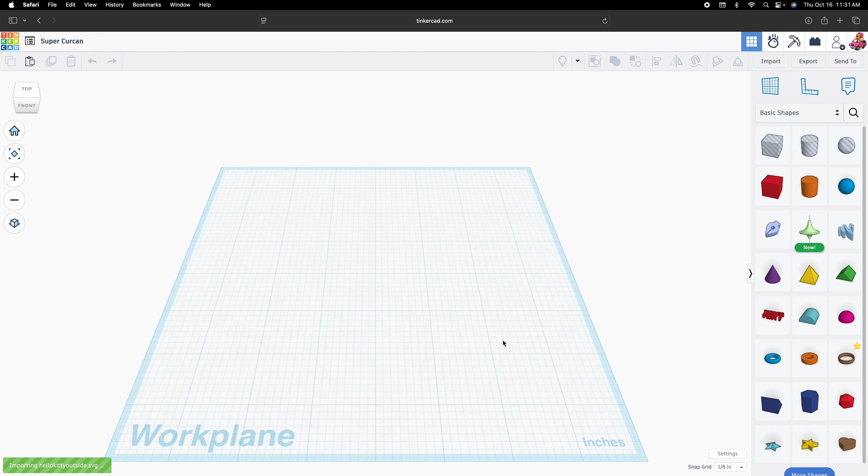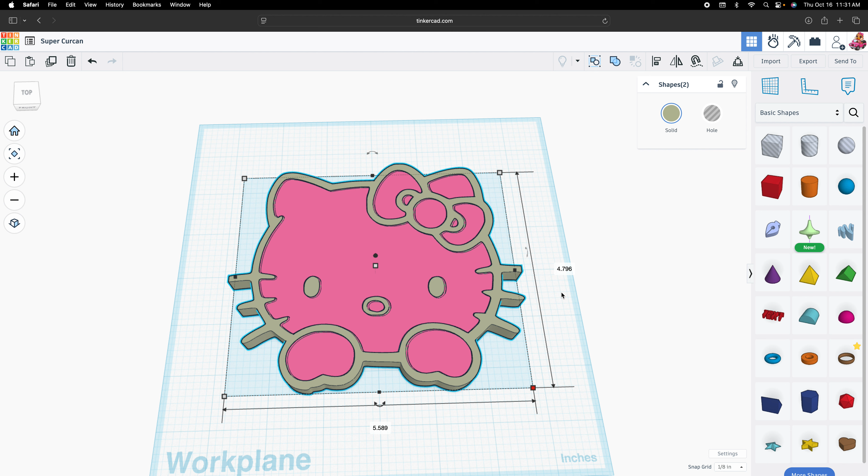Let's not do that. Click. Alright, 7, and then we want 7 here. There we go, finally. Alright, I usually center it.

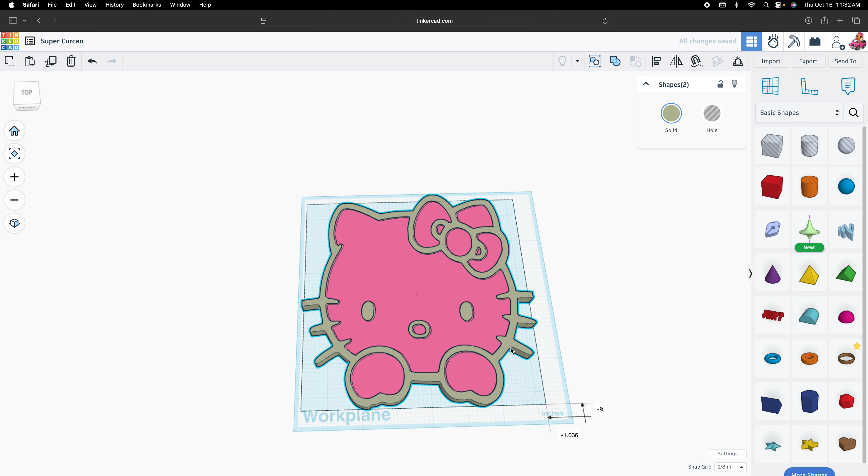Now I'm going to take the center part out and move her off to the right. I'm going to take the outline, move it to the left. I'm going to duplicate the outline, bring her back to the work plane. We'll take our quality all the way up.

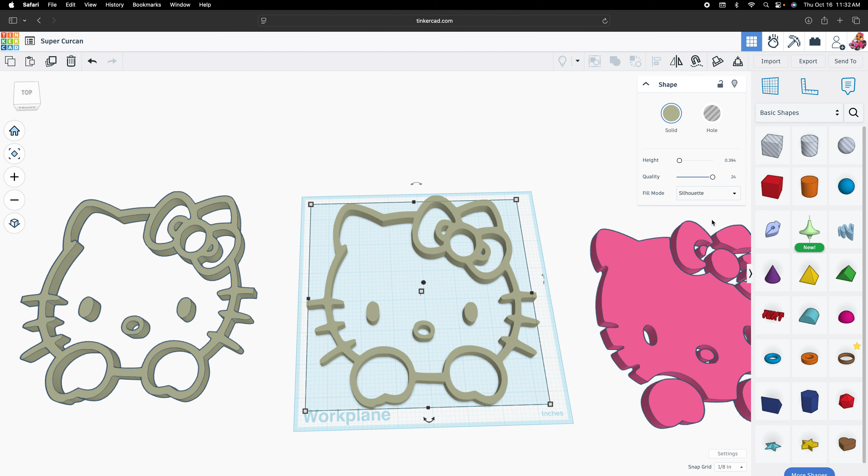We'll click on Fill Mode, Silhouette. We'll fill it all in. Hopefully - there we go. Now we'll turn it up like this, and we are going to push it down to an eighth.

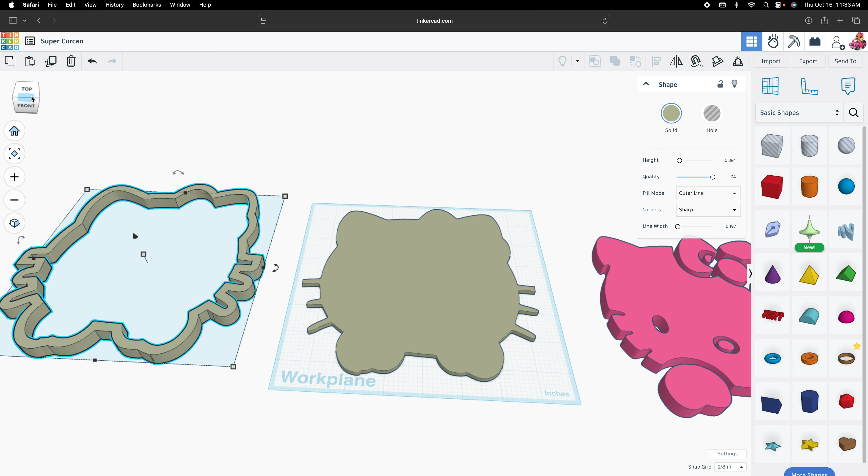Now we'll go back over here to the original. We'll go to Quality, Fill Mode, and we'll do an outer line. There we go. We're also going to turn that around, but we're going to bring it up to 1 inch.

Bring it back over here, set it on top of the silhouette. We'll highlight both of them, go up here to Align. Align it. Good to go.

Select them both again, group them. There we go, see, it's all nice and grouped. Now I'm going to change that color because I don't like it. Make it black. See? There we go.

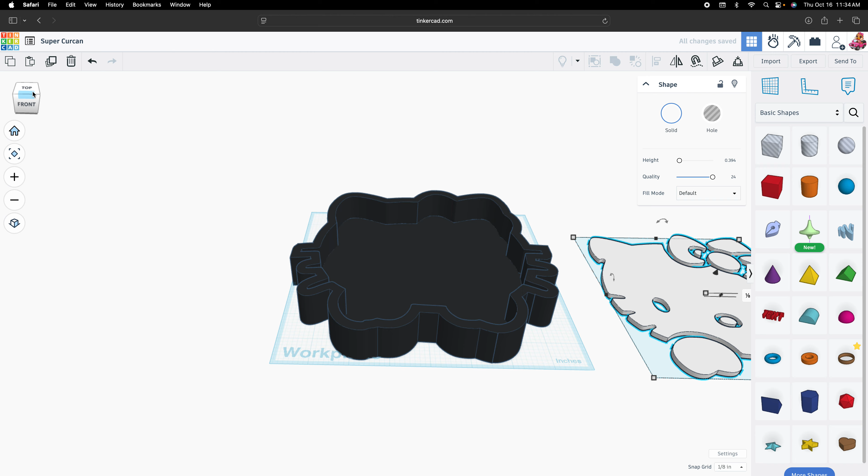Nice and neat. Now we're going to take the inside portion, bring the quality all the way up. We'll change that to white just because. I'm going to push her down to a 1/8 of an inch and bring her up and over to the object here.

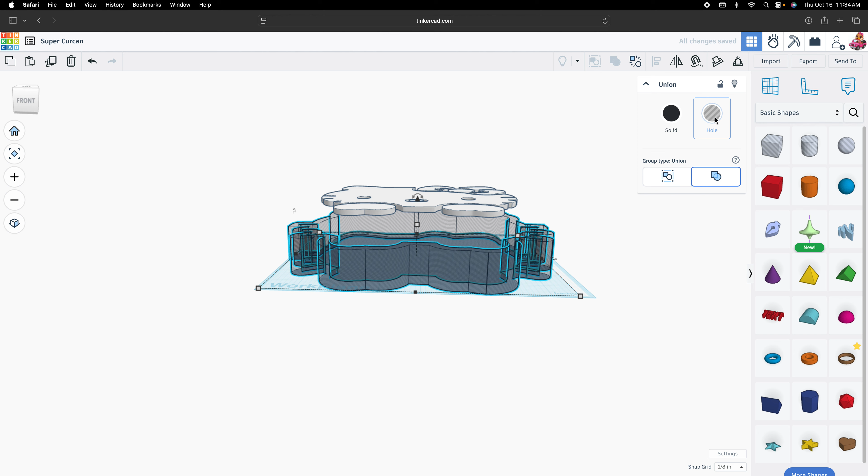We're going to select all, we're going to align again. There we go. Now here's what I like to do to make sure that I'm getting her where I need her to be. I'm going to select that, and make it into a hole so I can see where the bottom is.

Okay, now we'll click on it, push it all the way down till it sits right on top, and we'll turn that back into a solid. As you can see, we now have our STL file, and we are going to highlight all of it, export - see, this is only the selected 2 shapes, STL.

Alright, so now it's saved and ready for the next time. That's all there is to it, it's pretty simple. Next week we'll open the file in Bambu Studio, paint it, and save it as a generic 3MF file.